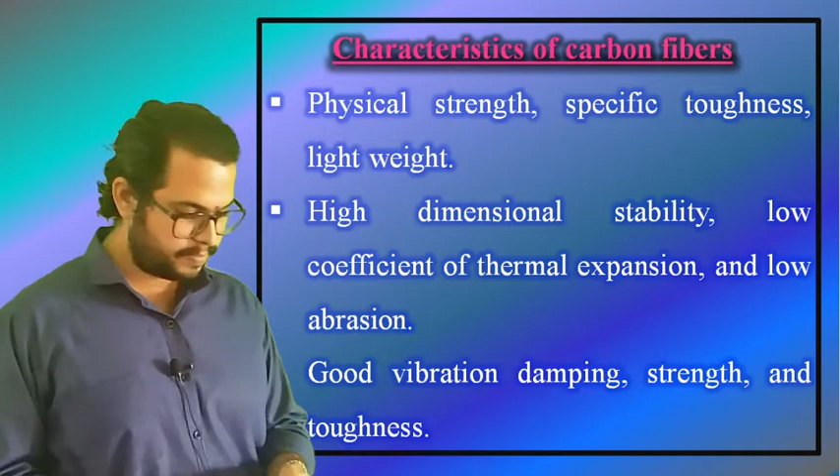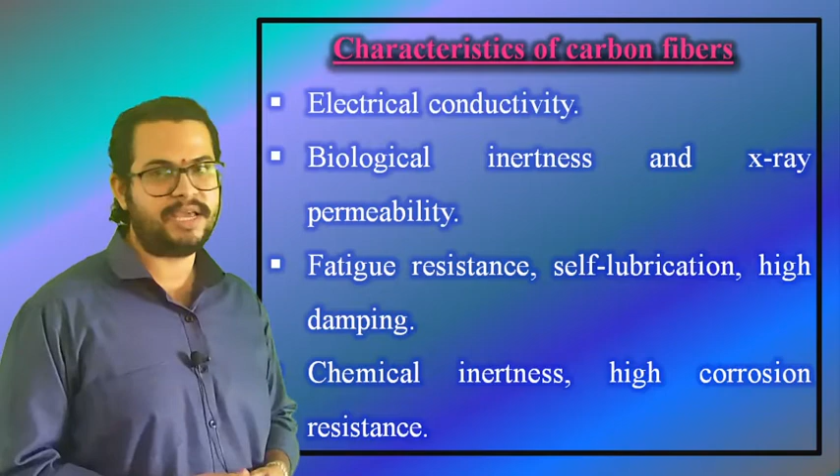Characteristics of carbon fibers. The following are the characteristics of a carbon fiber. First, physical strength, specific toughness, lightweight. Second, high dimensional stability, low coefficient of thermal expansion and low abrasion. Good vibration damping, strength and toughness. Next we have electrical conductivity, biological inertness and X-ray permeability, fatigue resistance, self-lubrication and high damping, chemical inertness, high corrosion resistance. And last is electromagnetic properties.

Now the next we have here is about applications of carbon fibers. Let us dig deep into them. As we have already seen various characteristics of carbon fibers, now we will try to list out all the applications based on each and every characteristic of carbon fiber.

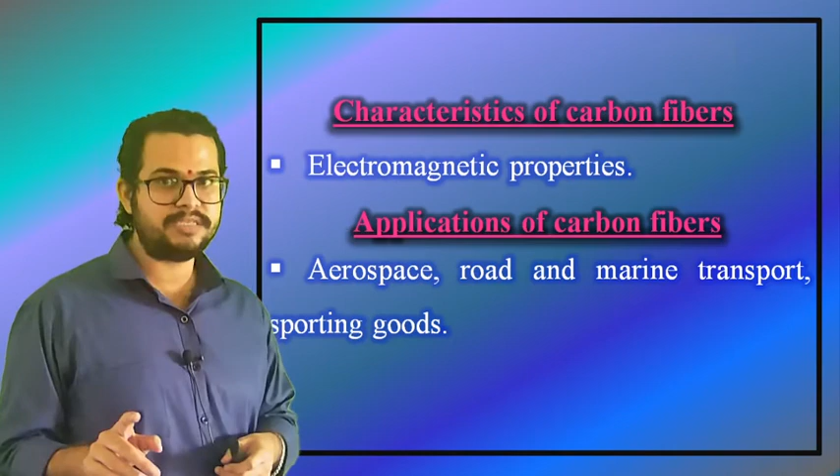The first characteristic of carbon fiber in our list is physical strength, specific toughness, lightweight. The applications related to these properties are aerospace, road and marine transport, and sporting goods.

The second characteristic of carbon fiber in our list is high dimensional stability, low coefficient of thermal expansion and low abrasion. The applications related to these properties are missiles, aircraft brakes, aerospace antenna and support structures, large telescopes, optical benches, waveguides for stable high frequency precision measurement frames.

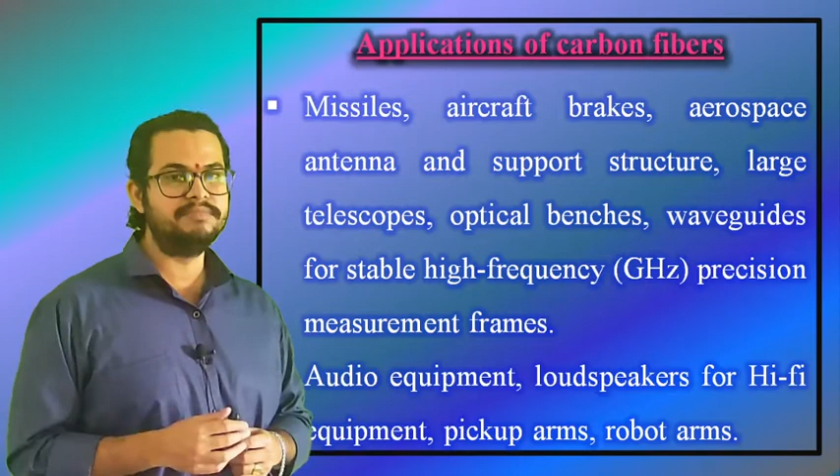The next property of our carbon fiber in the list is good vibration damping, strength and toughness. The applications related to these properties are audio equipment, loudspeakers for hi-fi equipment, pickup arms, robot arms, etc.

Now the fourth characteristic of a carbon fiber in our list is electrical conductivity. The applications which are related to these properties are automobile hoods, novel tooling, casings and bases for electronic equipments, EMI and RF shielding, brushes.

Next, the fifth characteristic of carbon fiber in our list is biological inertness and X-ray permeability. The applications related to this particular characteristic are medical applications in prosthetics, surgeries and X-ray equipments, implants, tendon or ligament repairs.

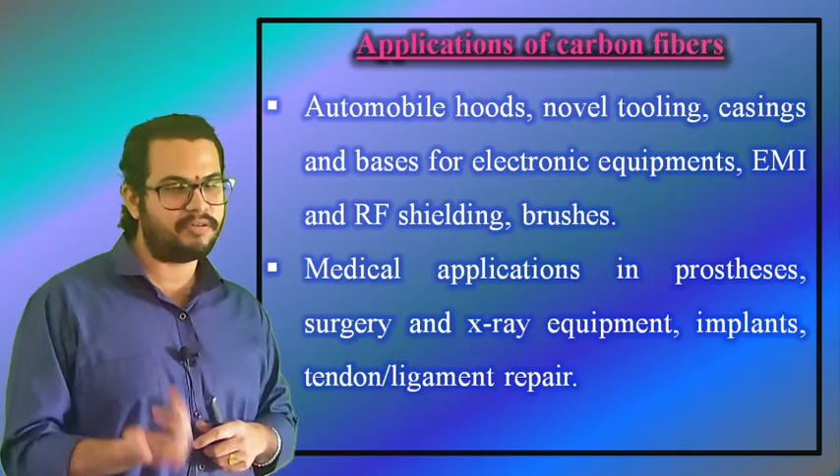Now next, the sixth characteristic of carbon fiber in our list is fatigue resistance, self-lubrication, and high damping, and the applications related to these characteristics are textile machinery and general engineering.

The seventh characteristic of a carbon fiber in our list is chemical inertness, high corrosion resistance, and the applications related to these properties are chemical industries, nuclear fields, valves, seals and pump components in process.

Finally, the eighth and last characteristic of a carbon fiber in our list is electromagnetic properties, and the applications related to these properties are large generator retaining rings, radiological equipment.

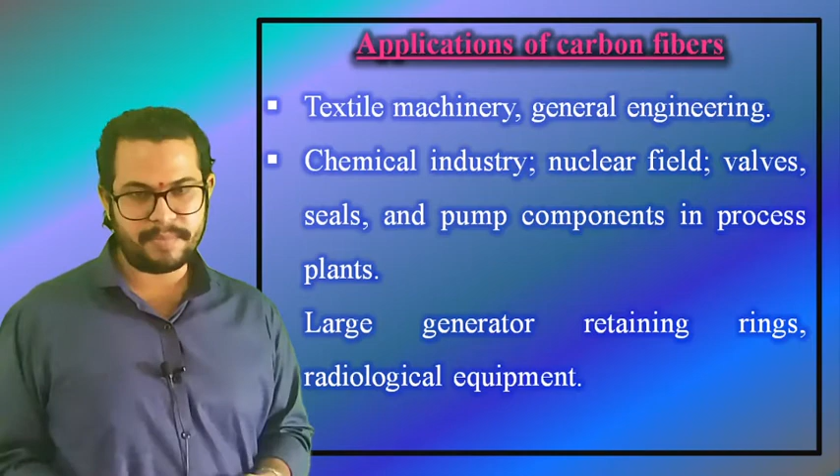Next, the future of carbon fibers. The latest development in carbon fiber technology is tiny carbon tubes, which are called nanotubes. These hollow tubes, some as small as 0.001 mm in diameter, have unique mechanical and electrical properties that may be useful in making new high-strength fibers, submicroscopic test tubes, or possibly new semiconductor materials for integrated circuits, as shown here.

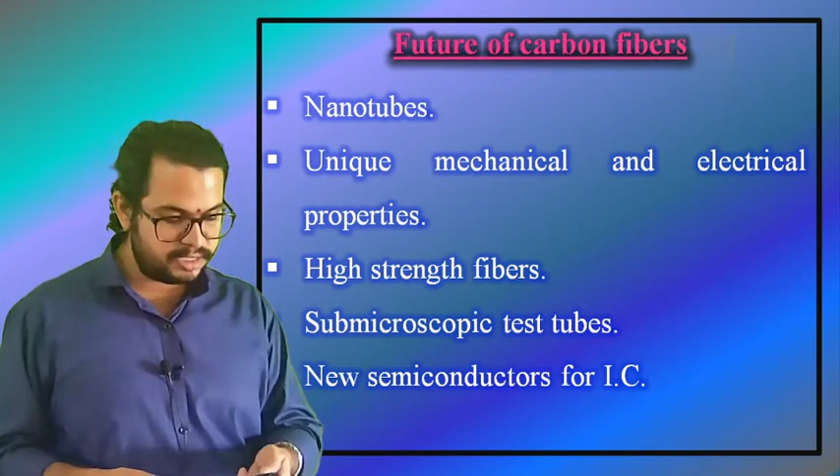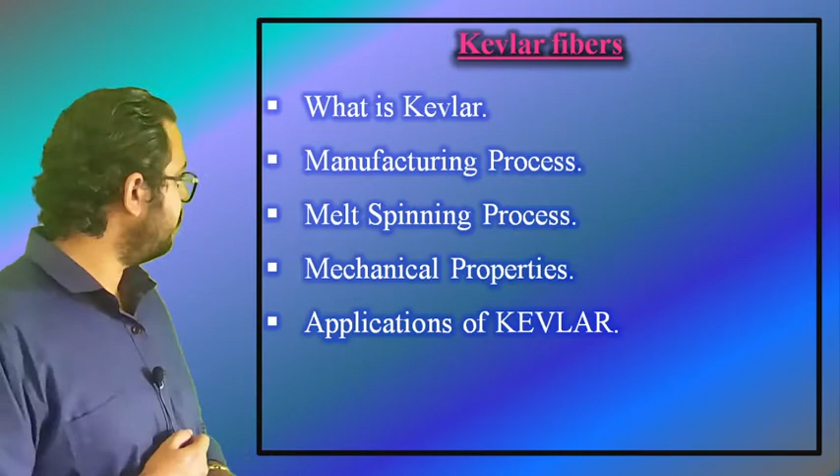Now, since we are done with carbon fibers, let us see about the next type of fiber in our list, that is Kevlar fibers. Under these Kevlar fibers, we are going to cover the following topics: what is Kevlar fiber, the manufacturing process of Kevlar fiber including melt spinning process, the mechanical properties related to it, and the applications of Kevlar fibers. Under these applications, we are also going to see important applications like Kevlar strings, Kevlar tires, Kevlar suit, and so on. Now let's start discussion about Kevlar fibers.

The most important question that comes into mind is, what is Kevlar? Do you know what DuPont is? DuPont introduced the first organic fiber with high strength, an aramid fiber with the trade name Kevlar 29, in the early 1970s. It was originally developed to replace steel in radial tires and is known to have tensile strength 5 times more than steel. The invention enabled fabrication of flexible bulletproof body armor.

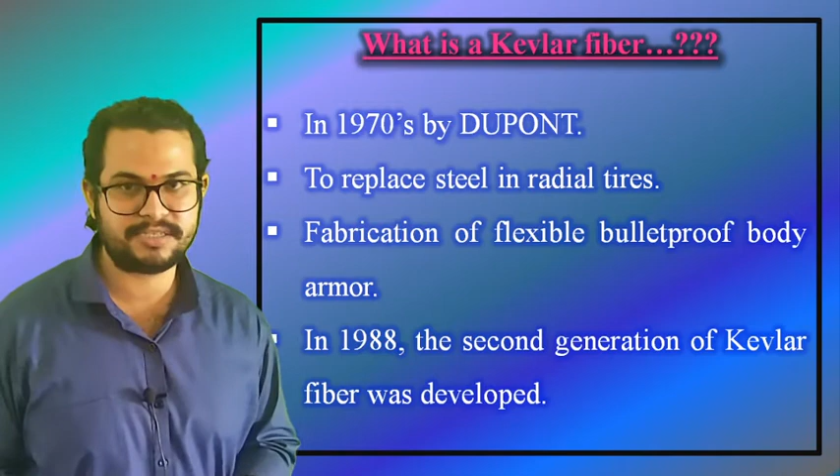In 1988, the second generation of Kevlar fiber was developed, which offers ballistic resistance against 9mm FMJ. What is FMJ? It stands for full metal jackets.

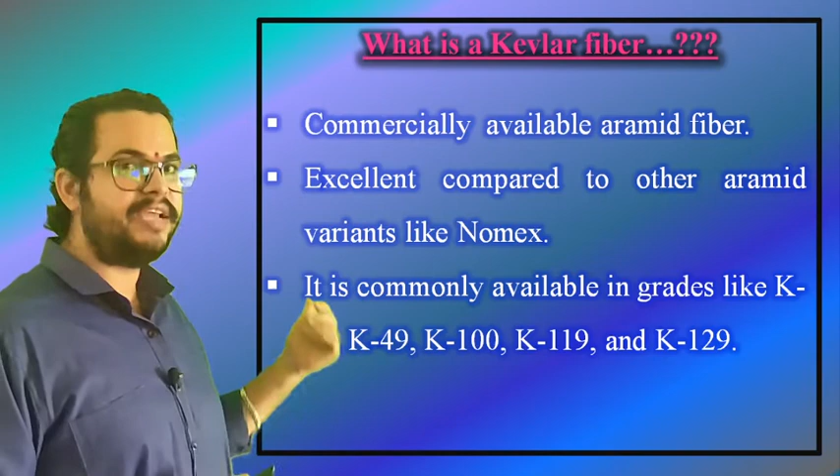Kevlar is a commercially available aramid fiber with excellent heat resistance and high stiffness relative to other aramid variants. Nomex is a flame resistant meta-aramid material developed in the early 1960s by DuPont and first marketed in 1967. DuPont first developed Kevlar fiber in 1970 for use in radial tires as a replacement for steel. It is commonly available in grades like K29, 49, 100, 119 and K129.

Presently, Kevlar fiber is available in a number of variants. Kevlar K29 is a high toughness grade used in industrial applications such as cables, body or vehicle armor, and brake linings. The next is Kevlar K49, which has a high modulus used in rope and cable products. The next is K100, the colored version of Kevlar. Kevlar K119 has high elongation and more fatigue resistance. And Kevlar K129 is a higher tenacity grade utilized in ballistic applications.

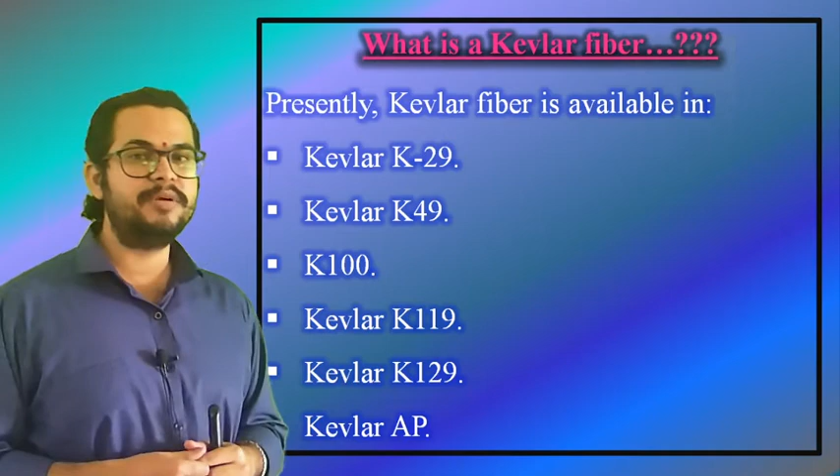The last one is Kevlar AP, which has about 15% higher tensile strength compared to K29. Kevlar is a polyparaphenylene terephthalamide, which is PPDT, commonly known as para-aramid. The structure is composed of benzene rings, which are responsible for high thermal stability, along with para substitutions, which result in high modulus and strength.

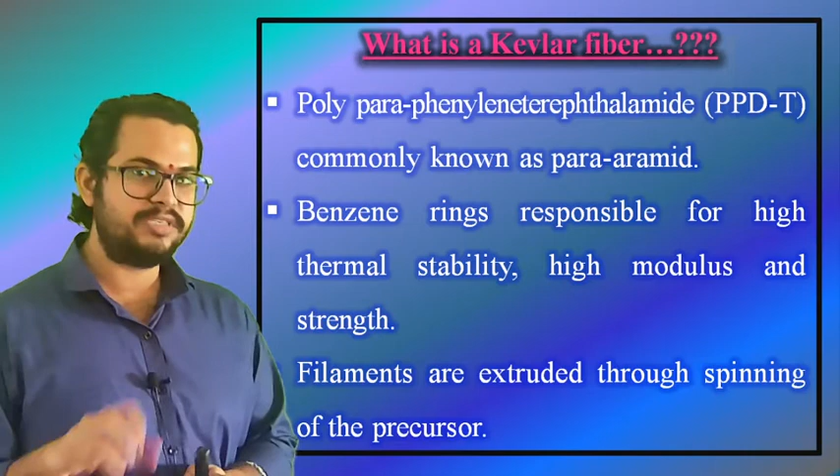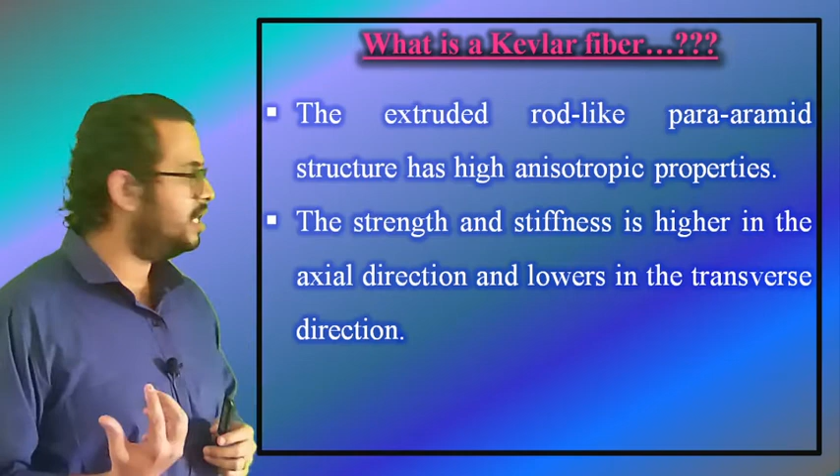The filaments for the fibers are extruded through the spinning of precursor. The extruded rod-like para-aramid structure has high anisotropic properties. The strength and stiffness is higher in the axial direction and lower in the transverse direction.

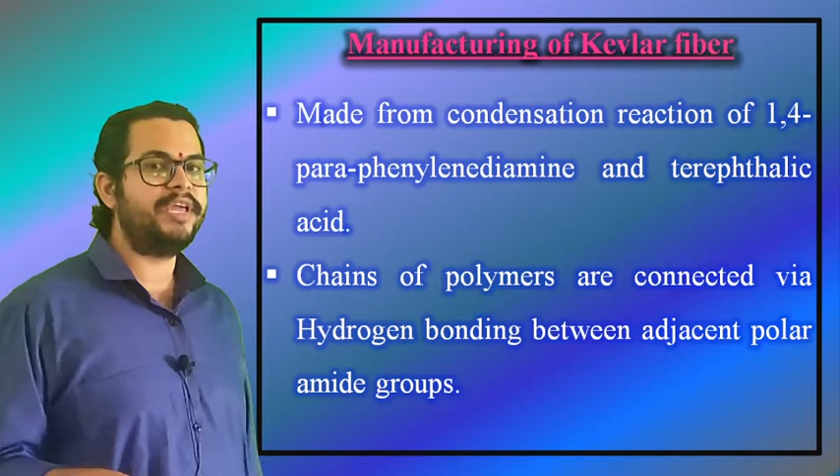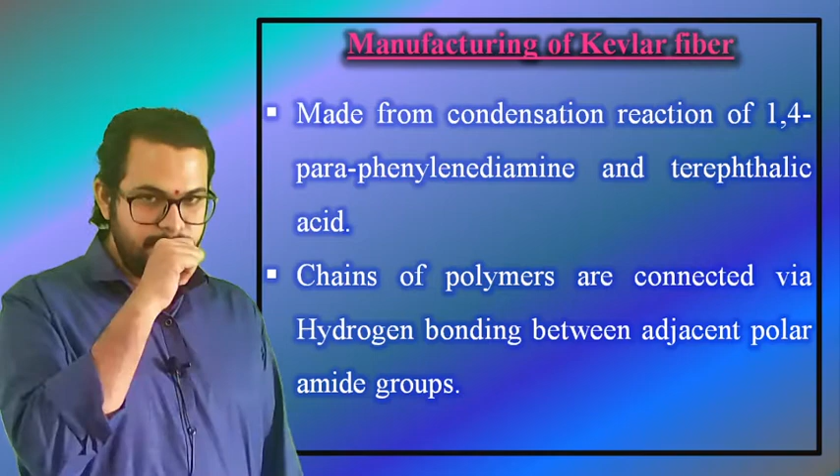The manufacturing process of Kevlar fibers: Kevlar is made from a condensation reaction of paraphenylenediamine and terephthalic acid. The presence of amine groups on the aromatic ring results in a rod-like structure which has high glass transition temperature and low solubility. The chains of polymer are connected to each other via hydrogen bonding between adjacent polar amide groups. The fiber structure consists of orderly oriented molecules parallel to one another, forming crystalline structures.

Due to high glass transition temperature and poor solubility, these fibers are difficult to process via conventional drawing techniques. Hence, melt spinning is used for their fabrication. During this melt spinning, the PPDT solution is extruded in a spinneret and drawn through an air gap, resulting in the orientation of the liquid crystalline domains in the flow direction. The polymer chains also align in the fiber axis, resulting in a high degree of anisotropy in this direction.

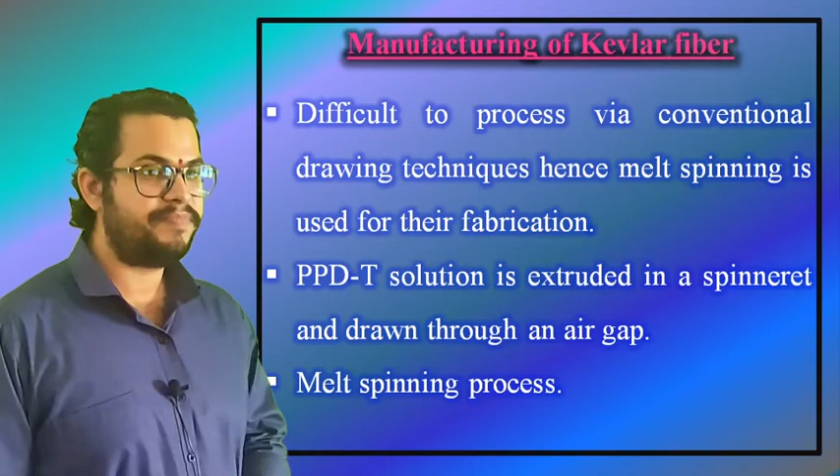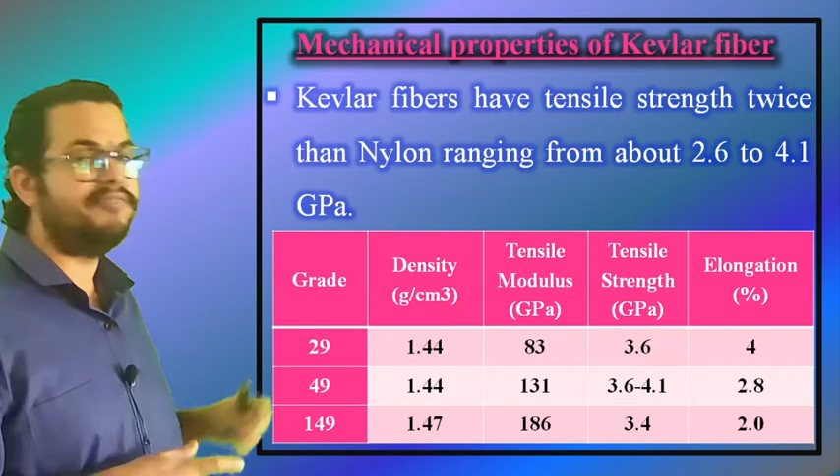Moving on, the structure of Kevlar has unique kink bands. What are kink bands? They are understood to be an important mechanism in fiber failure under curvature. They form as molecular chains within the fiber slip against each other under a compressive load, and these are responsible for the compression buckling of molecules. Hence they behave elastically under tension, but in compression they yield at 0.3% to 0.5% strain and show non-linear and ductile behavior.

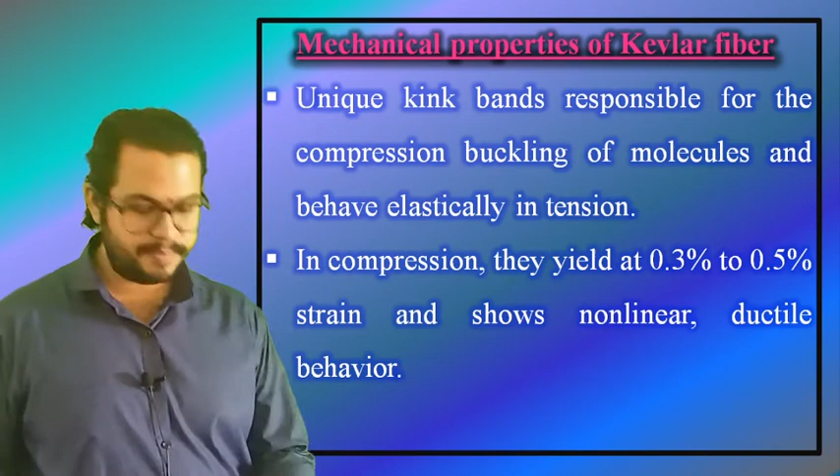The high thermal stability, attributed to aromatic rings, makes these fibers inherently flame resistant, with a decomposition temperature of about 425 degrees centigrade.

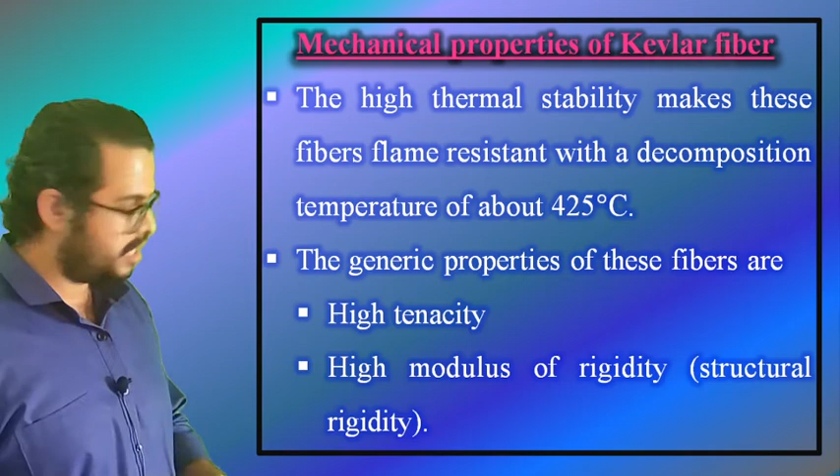The generic properties of these fibers are high tenacity, high modulus of rigidity (also called structural rigidity), low ductility, low electrical conductivity, low coefficient of thermal expansion, high toughness (also said to be like work-to-break ratio), high chemical resistance, excellent dimensional stability, and flame retardancy.

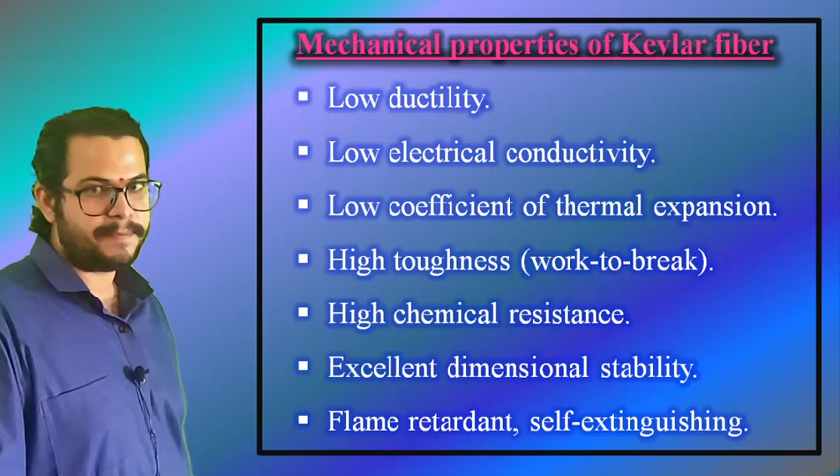Self-extinguishing. Okay, the next item in the list is applications.

In this slide we are going to see the different applications of Kevlar fibers. The exceptional and unique properties of the fiber enable it to be applied in a variety of applications, ranging from premium sports goods and deep sea umbilical lines to high performance structural composites in aircraft components, boat hulls, and high performance cars. The high tenacity and thermally stable fibers are used for lightweight bulletproof body armor, and due to weight saving it can also replace heavier metals in airplanes for fuel saving.

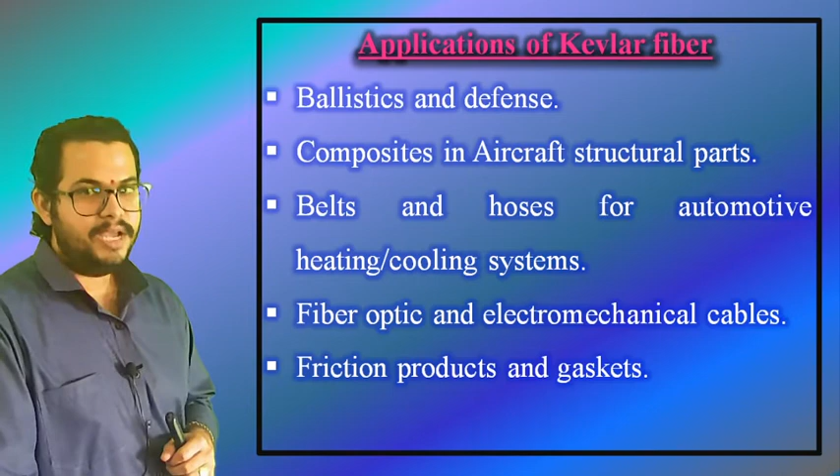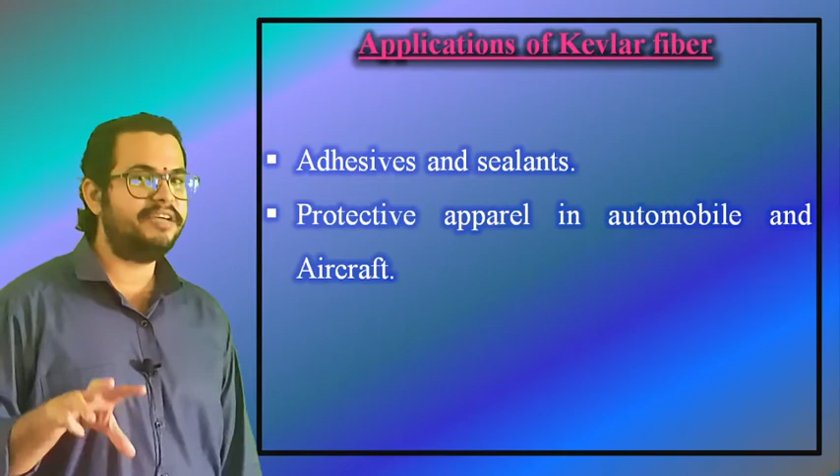There are a variety of applications as listed here: ballistic and defense; composites in aircraft structural parts; belts and hoses for automotive heating or cooling systems; fiber optics and electromechanical cables; friction products and gaskets; adhesives and sealants; and protective apparel in automobiles and aircrafts.

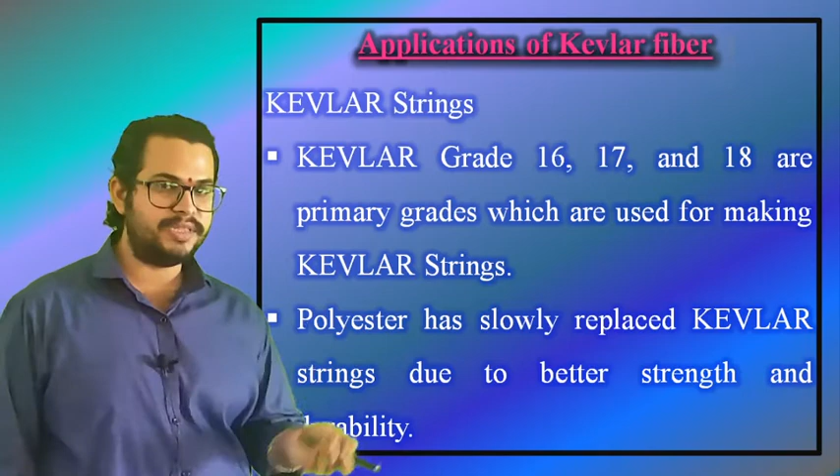Kevlar strings are one of the really important applications of Kevlar fibers. In tennis strings, high durability is considered a primary factor of consideration. Kevlar grades 16, 17 and 18 are the primary grades used for making Kevlar strings. Polyester has slowly replaced Kevlar strings due to better strength and durability, but that's a different scenario.

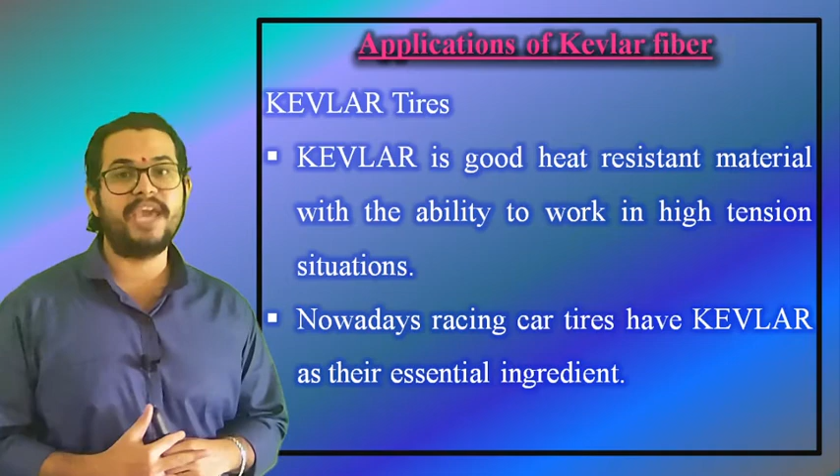Now the next application, Kevlar tires, is also very important. In fast racing cars and bikes, excessive friction on tires causes burning and overheating. The tire is composed of steel wires wrapped in rubber, but these steel wires are insufficient to absorb all the heat, which is why material challenges come up at high speed. Kevlar is a good heat resistant material with the ability to work in high tension situations, so nowadays racing car tires have Kevlar as an essential ingredient in their manufacture.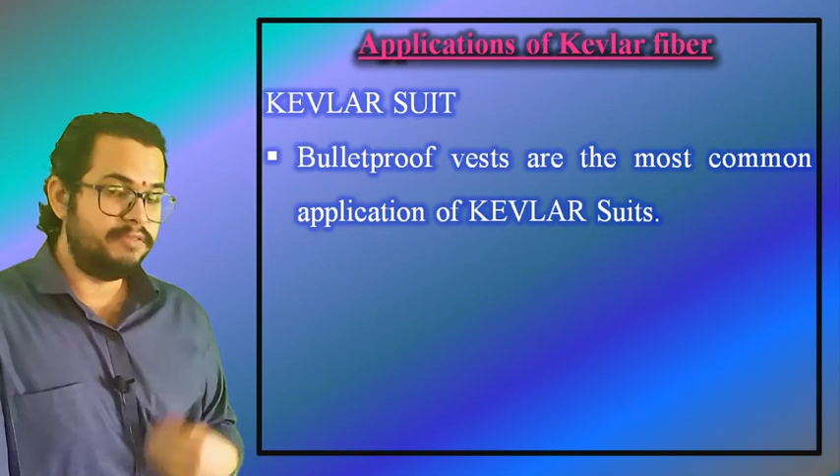Now the last application, Kevlar suits. Bulletproof vests are the most common application of Kevlar suits. Bullets are small metal parts that penetrate the body due to their high speed and design, but in Kevlar suits all the layers are threaded tightly together. These threads absorb the kinetic energy of bullets, which lowers the bullet's ability to penetrate the body. Without sufficient penetration power, the bullets become harmless.

With this, the topic of Kevlar fibers is done. In the next class we will see what boron fiber is, its different characteristics, the different preparation methods, and the applications of boron fibers. We will also see the differences between glass fiber, Kevlar fiber, carbon fiber, and boron fiber if possible. So with this I'm going to take a leave, and let's meet in the next class.